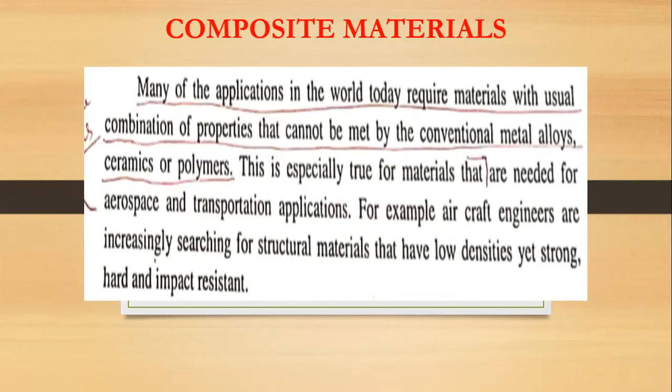All of you, please write down the question. What is composite material? Put a question mark. For that, write down the definition of composite material. Continue the question. List the classification of composites. Put a question mark. Next, continue the question. Write the application of composite materials.

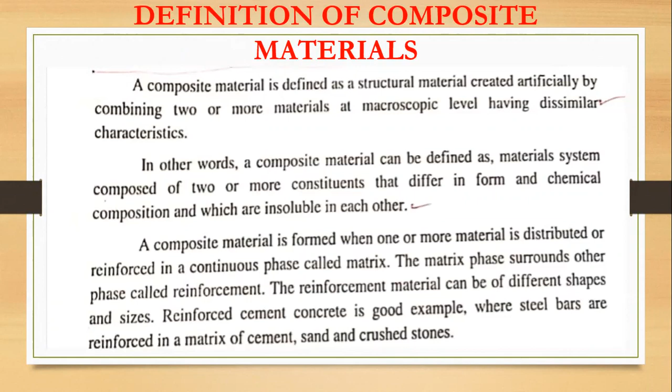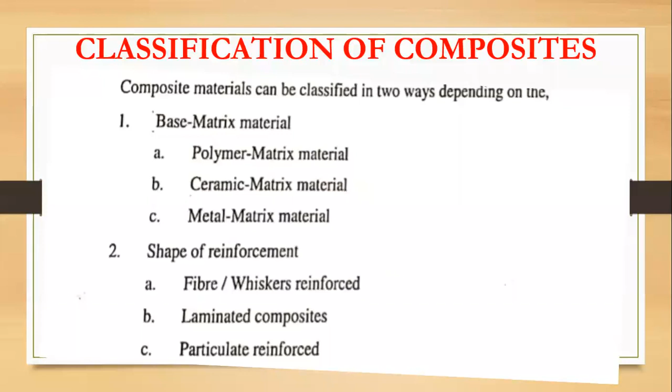All of you, mark it. Very important. You can expect this question in the 4th module for 10 marks in the examination. Once again, I repeat. First, what is composite material? For that, write down the definition. Next, put a question mark and continue the question. List the classification of composites. After that, write the applications of composite materials.

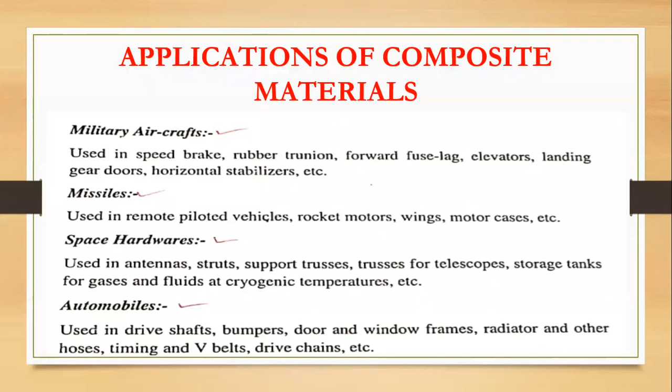Remember, this is very important. For any question on composite material, first you write the definition, second the classification, third the application. Whether you have a direct question or an indirect question on composite material, first write the definition, classification and application.

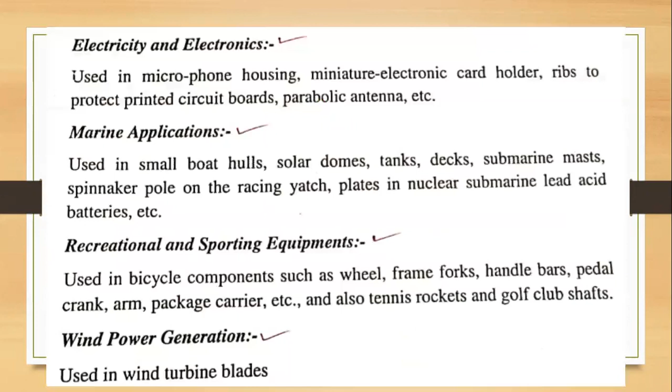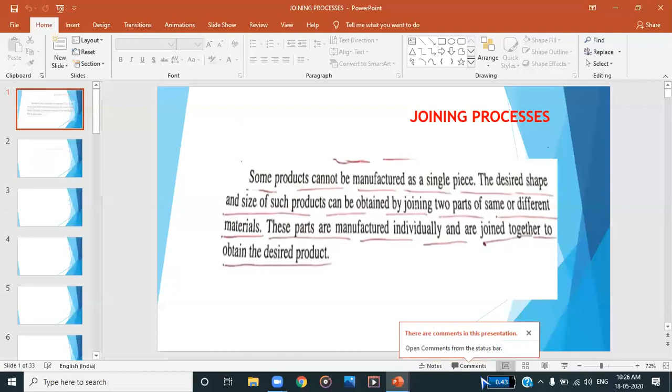Next, very, very important in your elements of mechanical engineering, that is the joining process. Joining process is nothing but joining of two or more metals or non-metals by the application of pressure and also by the application of heat, or by the application of heat.

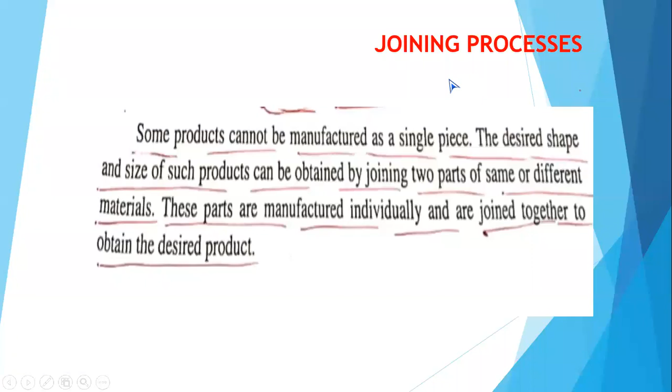The joining process may be welding, soldering, brazing, or fastening using bolts and nuts, and also riveting. These are all called joining processes. That is nothing but the joining of two or more metals or non-metals by using pressure or without pressure, and by using heat or without heat, by using other processes. If you join the material, that is called joining processes.

Next, come to the point how the joining processes are classified according to the requirement. How do you use a particular type of joining process? For example, soldering, brazing, or welding process. What is the requirement? Say, for joining of a small electronic component, that is the resistor, you cannot use welding process. You can use soldering process. So like that, the selection of joining process is very important.

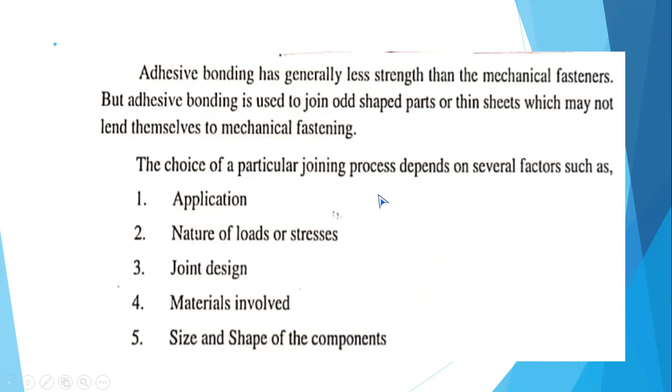Very important for all the engineers, whether you belong to mechanical or computer science or electronics: the soldering process is very much essential nowadays. Without the soldering joining process, there is no component at all. First, consider mobile. In mobile, you have lots of electronic circuits and also other electrical and electronic components which are joined by using soldering process. The process is carried out below 450 degrees centigrade.